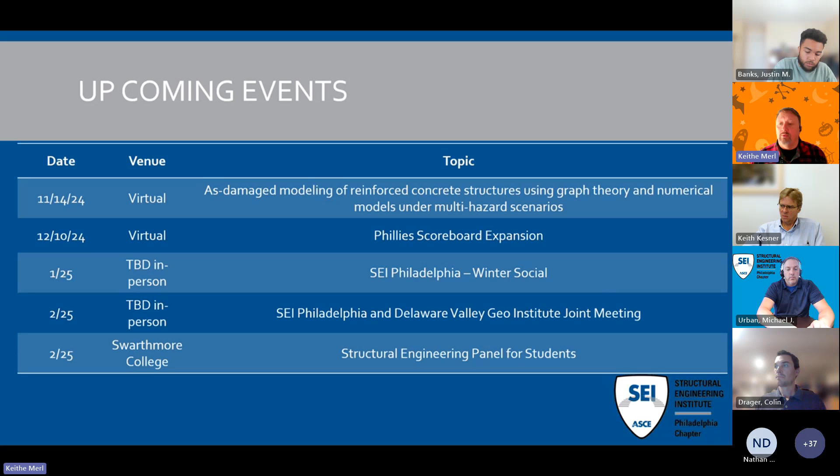So without further ado, I'd like to introduce today's speaker, Keith Kesner. 25 years of professional experience, so he's been doing this a long time. Certainly ask some questions and learn some stuff from him. Concrete, we all deal with concrete in our lives, and concrete doesn't last forever, I guess, unless you're a Roman, which they seem to have figured out, and we forgot all about it. BS from Connecticut, MS and PhD from Cornell University, so right up there with the smartest of the smart. I am so happy to be in your presence today, sir, and I look forward to you getting rolling here on the slideshow.

Thanks, Nathan. I'm going to start sharing my screen, and let's see if I can get this to work properly. There we go, I think that's correct. Looks correct to me. All right.

So I'd like to thank everybody for coming today. Thank you to Nathan and Keith for the invitation, and thank you to the board. It's really nice, as Keith mentioned in the intro, I'm an active member with ACI. I've done a lot of stuff with various ACI committees, and it's nice to have the opportunity to talk to an ASCE SEI chapter. I don't think it's something that we do enough. We tend to get siloed with professional organizations, and granted, nobody has enough time, but it's nice to talk to different people about different things.

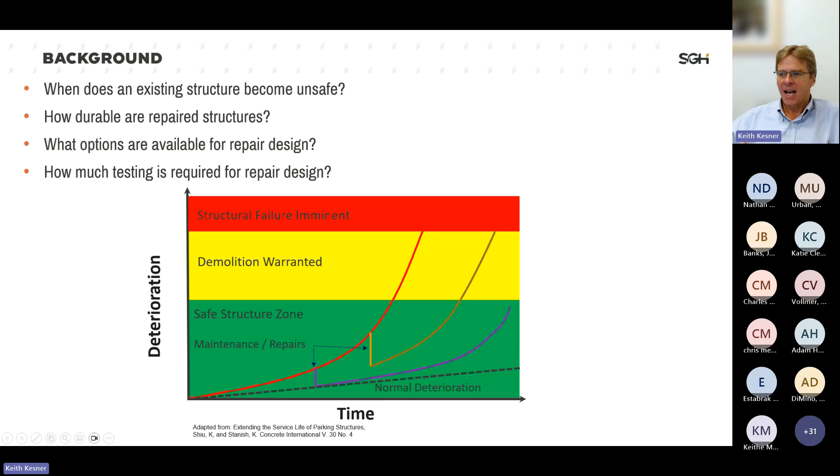We're going to talk a little bit about some options for repair design, different materials, and some of the background testing as to how we assess it. As I said, this is a hugely broad topic, so I'm really just scratching the surface on a lot of these topics. But I always loved, just thinking about existing structures, I always loved this quote, and I had to do a little bit of research to find out where it originally came from.

You can see the reference down there. It's by a gentleman named Dr. A.R. Dykes, and we're talking about, it's obviously a British spelling, but we're talking about molding materials we don't understand into shapes we can't analyze, to withstand forces we don't really know about, in such a way that the public has no idea of how stupid we are. That's basically what he said.

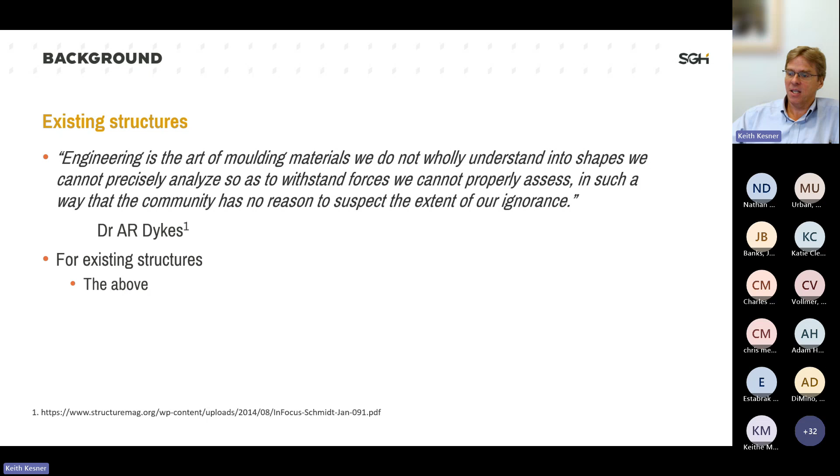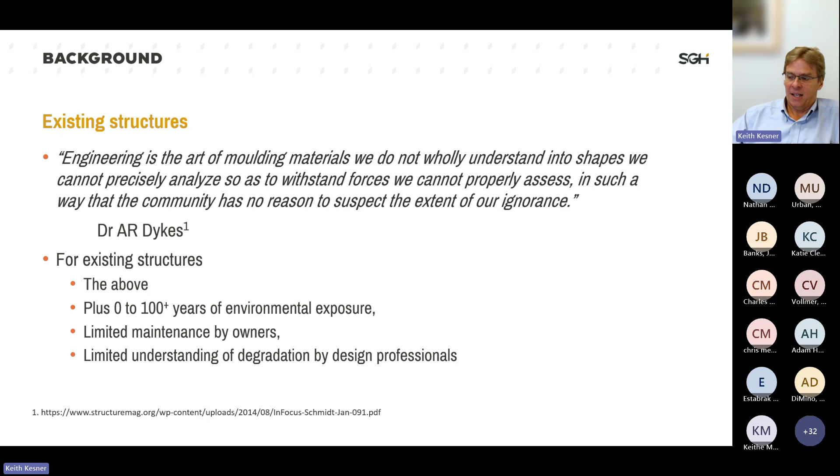When we start to think about existing structures versus new structures, you throw them out and leave them in the environment for 100, maybe 100 plus years. You don't maintain them, and we don't really understand degradation. Most design professionals really don't understand degradation of existing structures.

So what are the problems? What do we end up with? This problem of repair performance has been studied both by the Corps of Engineers in the United States and in the UK by the Building Research Establishment. They produced the graph shown in the upper right. This is the Building Research Establishment's graph. The Corps of Engineers data is very similar. It basically says once we start repairing a concrete structure, repairs do not last. Most repairs are failing in 6 to 10 years. That's kind of disappointing because we all know the problems once we have to repair a structure, and in the pictures you can see some failed repairs.

Why is this happening? We don't really practice durability design. It's not a common design condition that we're actually thinking about. In the last 10 years, Federal Highway said bridges are going to last 100 years. They did that, and in my opinion only, despite that mandate, we really don't have great consensus on how to do that and achieve a specific service life. Also in my opinion, US practice is a little bit behind international practice. There's much better practice in Europe and Australia for durability design. In the US, the origin is really that we don't understand existing structures, because we're not learning about durability as undergraduates or grad students.

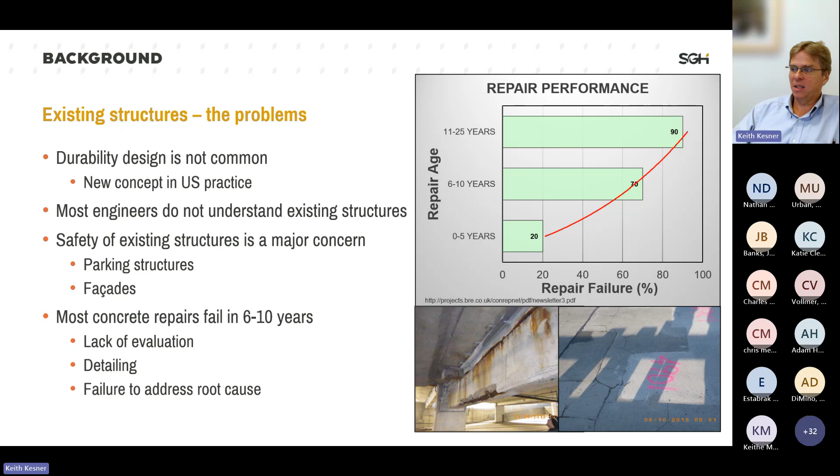So why is this happening? Really, we're not understanding the root cause of the problems. We don't do sufficient evaluations, and we're not detailing our repairs. So what does this look like? A couple pictures from failed repairs.

These are from my friend Tarek Alkhrdaji, who works at Structural as a repair contractor. These are all different structures that have had multiple cycles of repair, as you can see in the sort of cool looking mosaic on the left, or more ugly looking things where there's massive cracking from improper repair design, or combinations of corrosion damage plus repair failures. You can see over here, these are actually FRP strips that failed prior to this big section falling down.

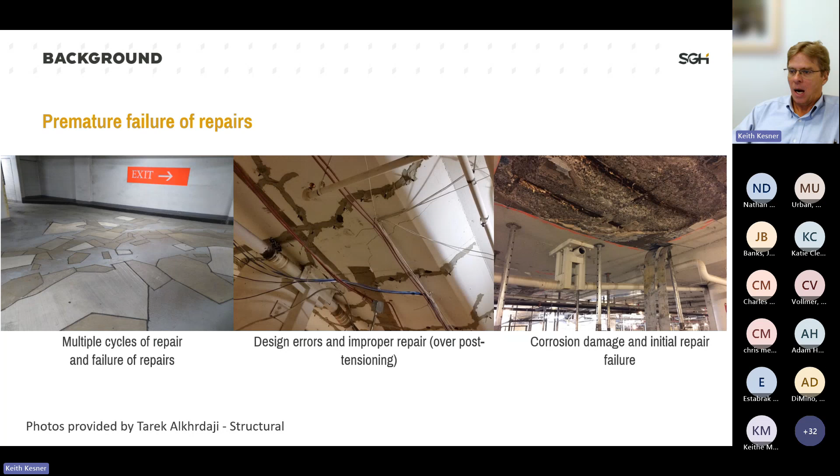That's kind of some of the things, and these are just in parking structures. We can also have similar things in bridges or other types of structures. So why are we getting these premature repair failures?

Really, it starts with concrete design, the problems with concrete design. In essence, building codes, whether for a building or a bridge, allow us to build the least durable structure that we're legally allowed to build, because a code provides a minimum requirement. Anything less than a minimum has been deemed to be unsafe. We can always do better, we can always exceed the code requirements, but the codes are always telling us it's going to have the least durable or least strong structure we can build. And entirely, in my opinion, our education in civil engineering and structures is entirely focused on structural behavior.

We really don't have a lot of coursework on durability. We look at the building code, but this is predominantly talking about ACI 318, and it lacks an integrated approach to durability. Durability in concrete structures is really a question of keeping water and other deleterious materials out and making sure that the materials you have are going to be durable. That includes both the concrete and the reinforcing steel.

If you read through the ACI 318 code and commentary, you'll never see that discussed. They talk about minimum requirements for concrete for initial structures based upon exposure. They'll talk about different types of reinforcing steel - you can use epoxy coated, galvanized, or regular steel. But there's really never a discussion about how you can put those together to create a more durable structure.

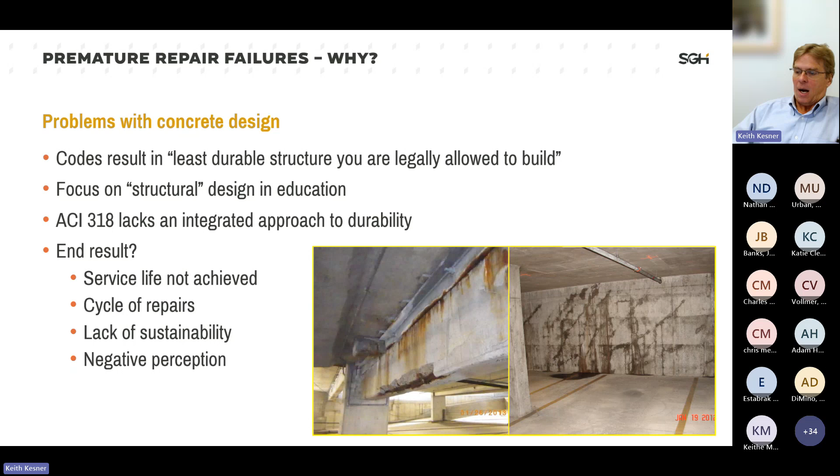So how can we focus on that? How can we do better? We need design professionals to start thinking about repair as a distinct area, understanding better how we can evaluate durability and evaluate structures. We need to get contractors focused on quality, and we really need to start changing US national codes to produce a more holistic approach to structural design. So we're actually starting to think in our code and building design about whether these structures will be durable, sustainable, and resilient. We're starting to see that in US practice, but we're really a long ways away from that.

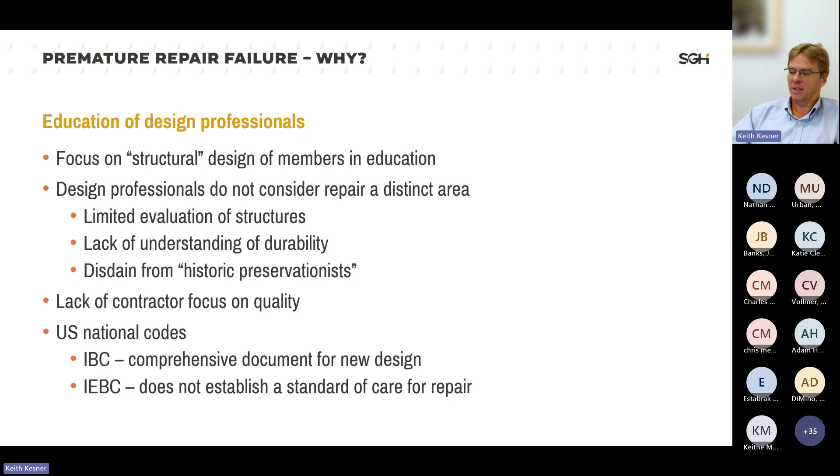The other problem we have, and I know this is predominantly a bridge audience, is that the IEBC, the International Existing Building Code, which is our building code for existing structures, really doesn't establish an effective standard of care for the evaluation or design of actual repair structures. It doesn't really define the level of durability that's required or provide a really good definition of damaged structures. And that impacts how we design repairs.

So today I'm going to talk about some new codes which came out from ACI and reports. ACI 562 was actually the concrete repair code that ACI developed - I was the chair of the second version of that code. It's really the first document developed exclusively to provide a code for repair of existing structures.

The other two are newer. ACI ITG 11-24, kind of a weird name, but that's a report. What I really wanted to talk about, and it is very new - it's the first document published - really talks about using statistical techniques for assessment of existing structures. Why is that important? It's important because when we start thinking about existing structures, we can't sample everything. We can't turn a structure into Swiss cheese. But we need to understand when we do take samples, what those samples mean, and how we can use those to better evaluate the safety of an existing structure.

What I thought was cool about this was, for those of us that took a graduate level course in reliability, it's kind of the first document that takes all that reliability theory we learned - some of which you also learned in advanced statistics as an undergraduate - and puts it into one document exclusively for concrete structures. So I think I'm going to talk a little bit about that today.

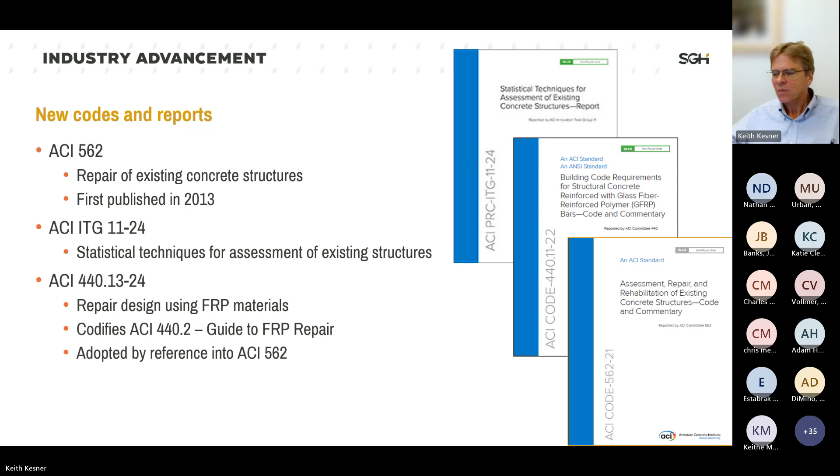So we're really trying to advance the industry that way, with the repair code establishing minimum performance of repaired structures.

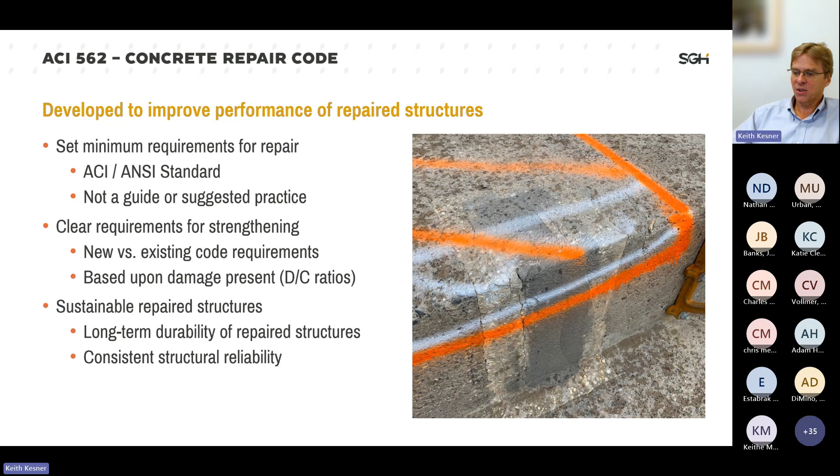How does it do this? It's a standard, not a guide. It wanted to provide clear requirements for strengthening of existing structures when required, based upon the damage that's present, and getting into this concept of more sustainable, more durable repaired structures.

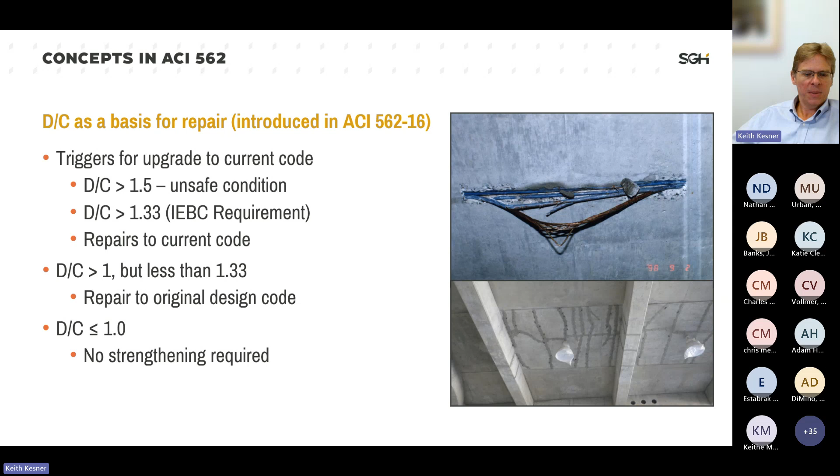So we're trying to get consistent performance and better levels of actual reliability. All these levels of performance were based upon demand to capacity ratios, based upon reliability work we did to establish when structures actually become unsafe and when we need to strengthen structures to current code requirements. You can see some of these trigger values in the attached chart on the screen.

But I wanted to go through how we actually use it on a typical project. Whenever I get a phone call or email about a new project, my initial thoughts are: what are we going to do? Do we need to do just a detailed evaluation? Do I know anything about the structure, or can I just go out there? And then what sort of unsafe conditions may be present?

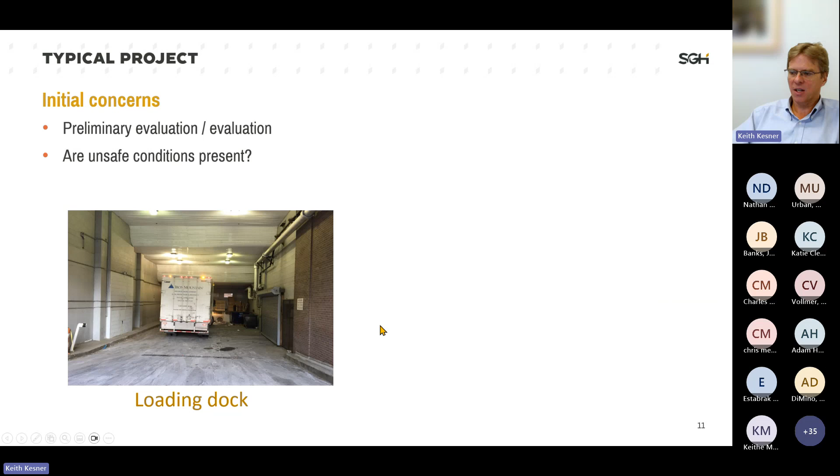This is a project I worked on a couple of years back. This is a loading dock and entrance to the parking garage, which you can see at the roll down door here. It's not super heavily loaded—we're not getting semis into this thing, but fairly reasonable sized trucks are going into this loading dock, certainly greater than a passenger car but not quite a semi. So what was the problem?

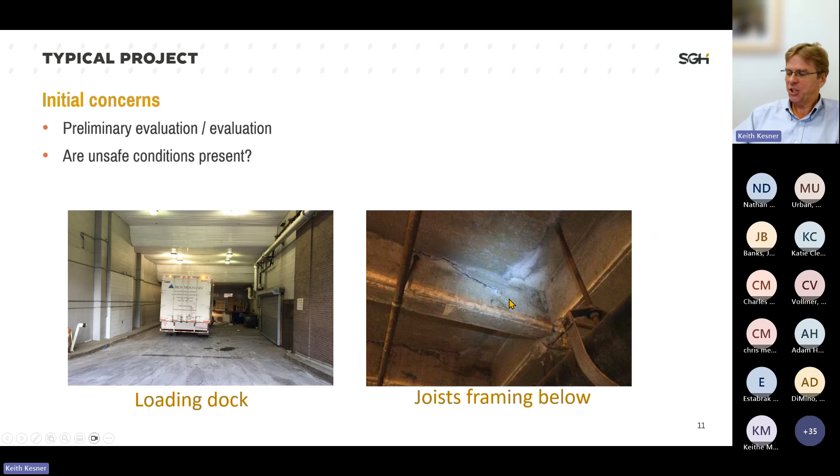Underneath, directly underneath this location, one-way concrete joists were basically failed in shear. Once I saw this, we started thinking: what's going on? What sort of unsafe conditions are present? But also, when we started thinking about the repair code, how are unsafe conditions defined?

A definition is presented in the IEBC. It talks about partially collapsed structures, so loose materials—yes. Example on the right, which is from Franklin Field before the repairs: that loose material held up on the netting, that's unsafe.

The IEBC talks specifically about a risk of collapse under service load, but what level of risk? That's not defined—that was always left for the engineer to figure out. The IPMC, International Property Maintenance Code, tries to specify: is the strength exceeded by the nominal load? Is that a better question? That's actually a little bit better definition. But the important thing is the IEBC and IPMC don't give you any information about how to actually calculate the capacity. And that's a lot of what we did with ACI 562.

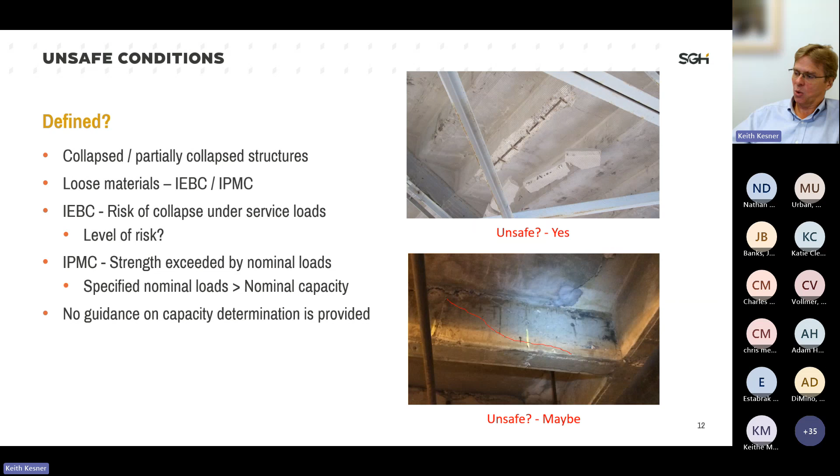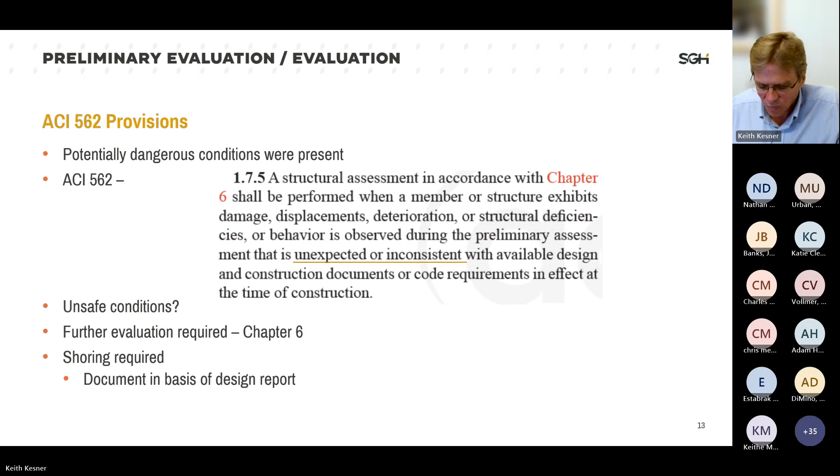So when I look at this picture of this joist, is that truly unsafe? Maybe. Going back through on this project, we found that potentially dangerous conditions were present, and that's used as a trigger to require additional evaluation. It was also used as a trigger to document the need for shoring.

So what are we looking at? Why is it unsafe? The shear capacity of a joist—demand to capacity ratio, if it's greater than 1.5, it's considered unsafe. So pretty simple. Shear capacity is VC plus VS, so it's 0.75 times VC plus VS. VC, because of the crack, is 0.

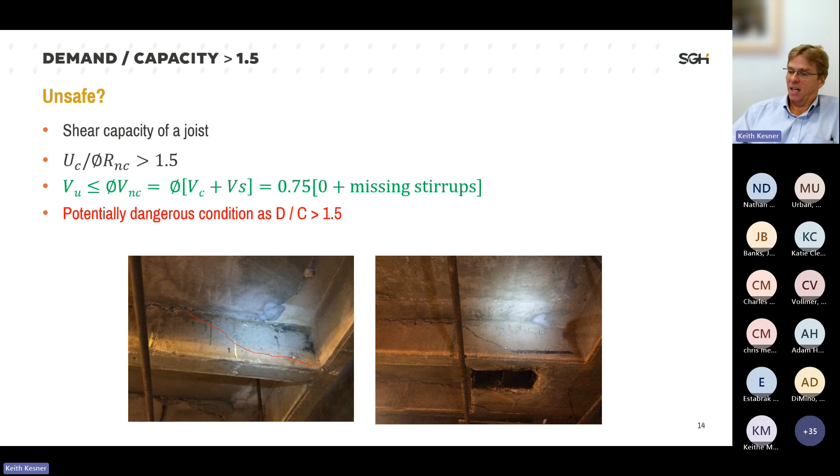When we did some radar, we basically found it's missing most of the stirrups that we're supposed to have. So 0 plus 0 from missing stirrups is significantly unsafe. So that was potentially dangerous, and we did need to shore it.

How do we shore it? The owner told us very explicitly that when we shored it, we needed to keep the structure open. So we provided layout plans for the shoring. The contractor did design the actual shoring based upon the shoring load requirements and shoring placement requirements that we gave them. And we allowed that structure to remain in service once it was shored.

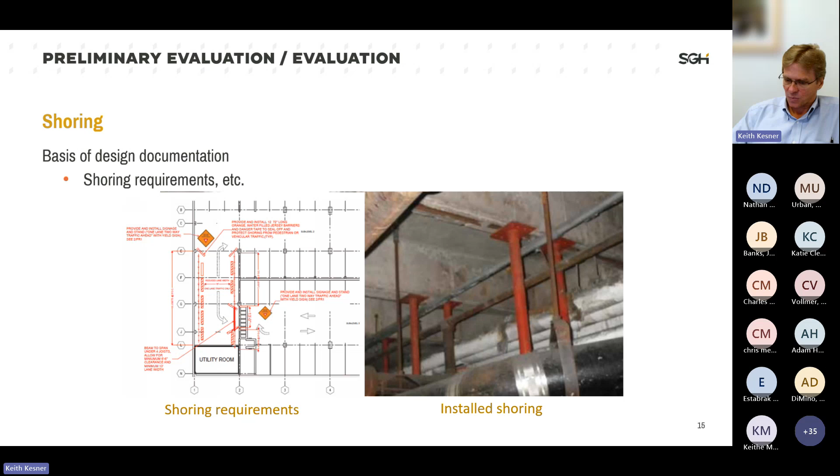So thinking about how we used ACI 562 on this and what were some of the advantages: the evaluation of the damage was simpler because of clear definition. As the damage was defined, we had fairly clear evaluation requirements. The unsafe conditions, instead of being vague definitions, were based upon damage and actual presence of conditions. And then when we eventually got into the repair design, the actual repair design had well delineated requirements.

We're talking about durability. For background, we ended up replacing the entire loading dock area during a winter break. It was done in 3.5 weeks, starting the day after Christmas, finished before classes started. Eventually a coating was placed on it.

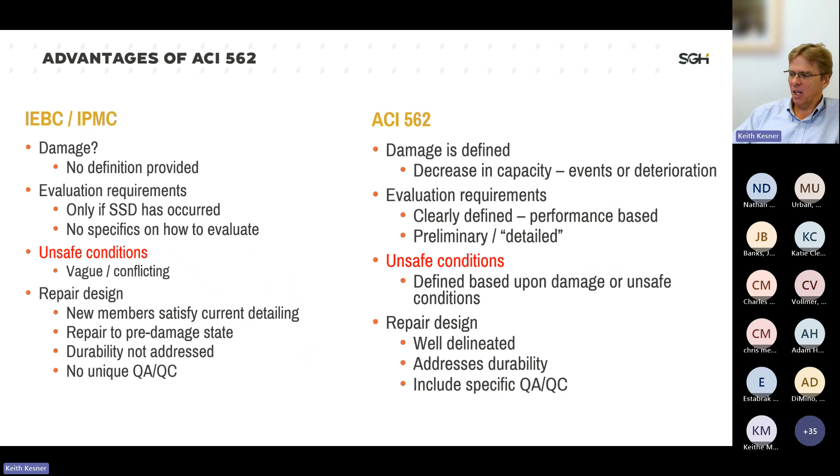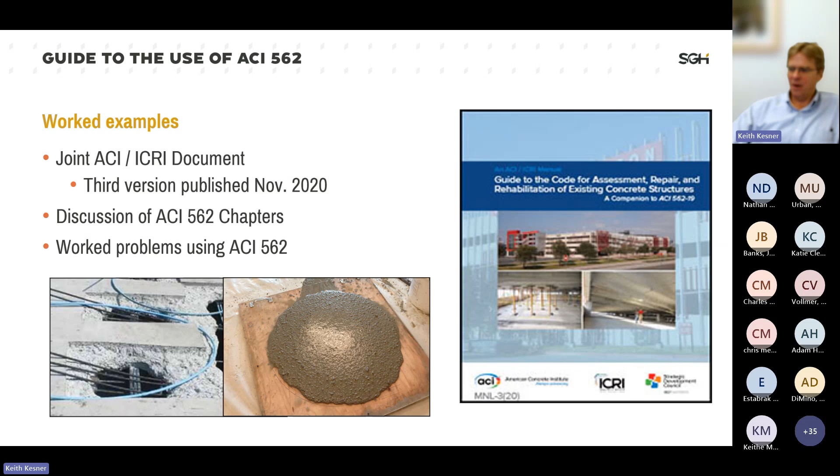I'm going to come back to another example using ACI 562 later in the presentation, but if people are interested in the document, one of the other useful documents is a guide to the code, equivalent to the old PCA notes for ACI 318. This was jointly published with the International Concrete Repair Institute, and it provides a lot of worked examples using ACI 562 and a discussion of how the code's intended to work. So that's another useful document.

Statistical techniques for assessment of existing concrete structures - that's a long title. When we developed the 2019 version of ACI 562, we recognized that design professionals needed more guidance. We didn't have sufficient technical guidance on some of the statistical techniques we're using to evaluate these structures.

Starting back, when we talk about assessment of existing concrete structures, we're typically taking cores. We may be doing measurements of cover depth, measurements of chloride content. We may get samples of material, samples of concrete from a slab versus a beam. Are there differences, and are any differences in the results statistically significant? If we have cover measurements, what's our confidence level that we have in them?

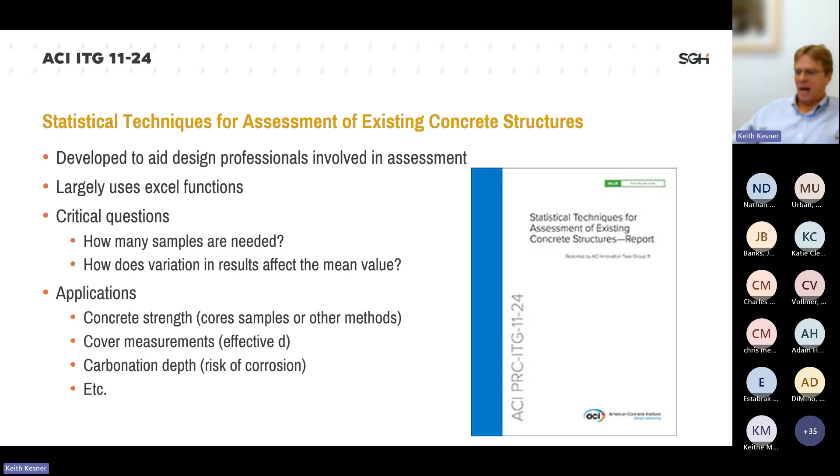So this document was put together as a way to explain a lot of those statistical functions, largely based upon Excel. It's all built into Excel, and it helps us understand when we're doing this work, how many samples may be needed depending upon the confidence level that we want. How does the variation affect the mean value? What are our applications - cover measurements, concrete strength? There's a lot of them.

There's an actual procedure outlined in the ITG where we're evaluating using what's statistically termed the F test, which is a comparison of variance. If your F test result is greater than 0.05, it's not significant. For this data set, despite the differences in the standard deviation, the F test result indicated the differences were not statistically significant. What that allows you to do is provide a much bigger sample - instead of having 12 cores in 2 different sets of samples, you can really consider that one statistical sample.

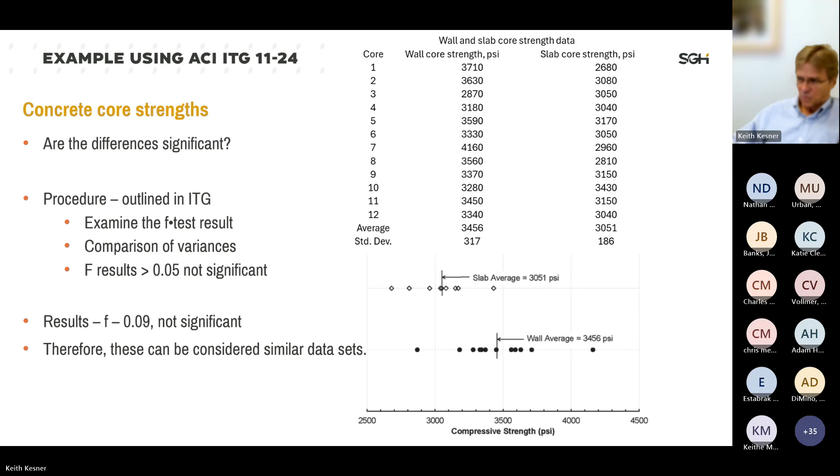And there are similar data sets. That helps you out in your analysis - now you have a much bigger sample.

Some of the other topics covered: if you have a desired confidence level, how big a sample size do you need?

Reliability-based assessment of member strength. So if we have a member that has a variation in concrete material properties, reinforcing steel depth - how does that variation affect the actual strength of the member, and what does that mean?

The other thing that ties in is something called the mean load method, which allows us to do a calculation of reliability. We're all familiar with the concept of beta as a measure of the probability of failure of a structure. We can calculate beta based upon average strength values obtained from the structure without load or strength factors, based upon a first order reliability assessment. There's a nice worked example on how you do that, which is basically a simple way to calculate the probability of failure of a structure.

So that's some of the things that are present in the ITG. I just want to include that as part of this talk, to make people aware that the document's available.

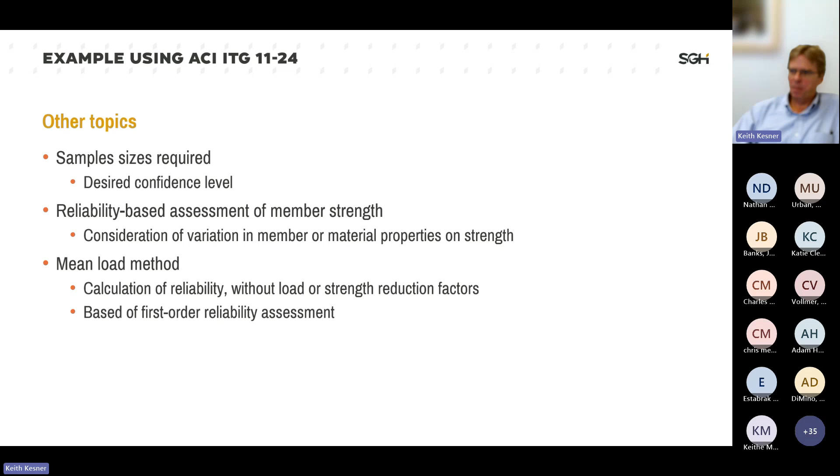So let's talk a little bit now, jumping ahead, about strengthening structures with FRP systems. There's tons of FRP type systems out there - basically high strength fibers. These are applied to concrete structures, masonry structures, bridges, parking structures.

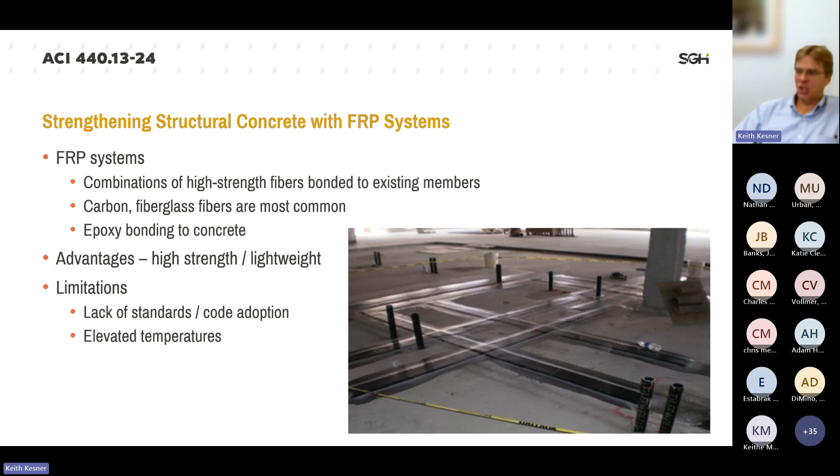We're typically using glass or carbon fibers, then using epoxy to bind them to a structure. These are all high strength, lightweight. But what's the limitation? There's really been two. They don't perform well at elevated temperatures, so if you're exposed to fire, that's a problem, and it's very difficult to fire protect these. The other issue has really been a lack of standards and code adoption, and that's what's changed in the last couple of years, and that's what we're going to talk about today.

So different applications - some of these slides are from my colleague Gustavo Tumialan at SGH. These can be used to strengthen a flexural member, where we're adding external reinforcement that's bonded. Very commonly used to increase the shear strength of a member. You can also, though it's not the best use of the material, provide some axial strengthening. But more importantly, when you wrap them around a structure, you're providing better confinement, which allows for better seismic performance. So those are some of the common applications.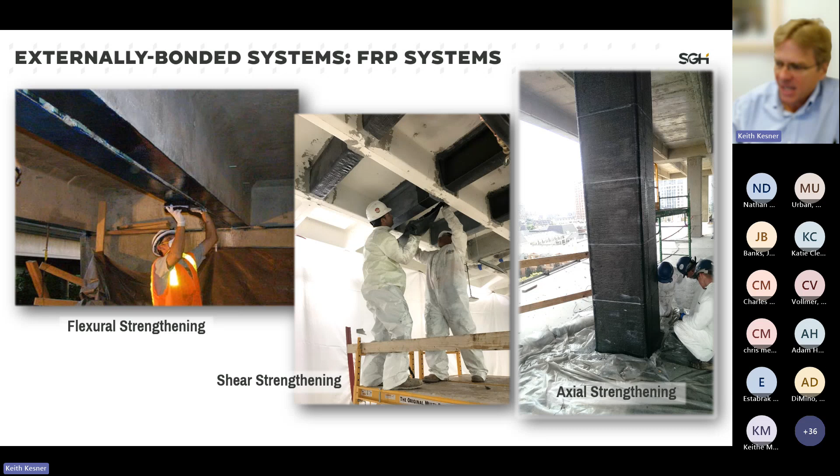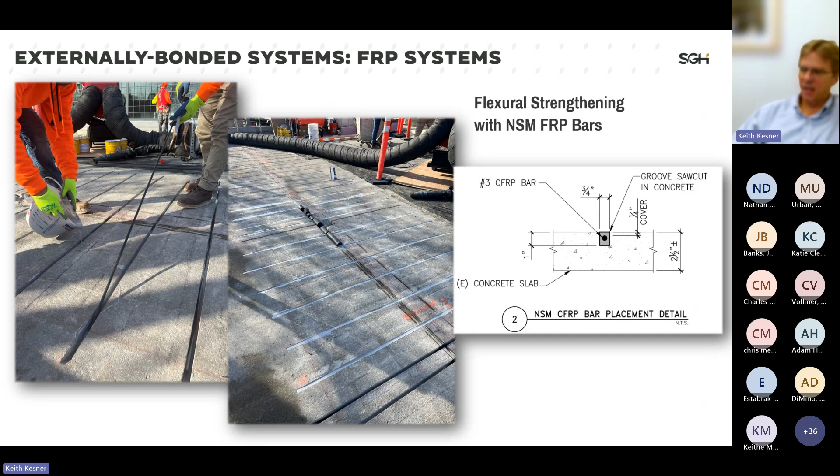These can be internal or external. The previous slide, they were all on the exterior, using epoxy to bond to the structure. When you're doing it internally, you're cutting a slot in the structure, and then using epoxy or other adhesive to bond the FRP bar back into the concrete structure.

So some design considerations. What's really being done? ACI 562 adopted the ACI 440S document by reference, and ACI 440S was really a codified version of the ACI 440.2 guide. In terms of hierarchy, a guide cannot be adopted into a code - only a code can be adopted into a code. When you adopt a code by reference, that brings all those mandatory requirements of the specialty code, in this case 440S, into the adopting code, which is 562.

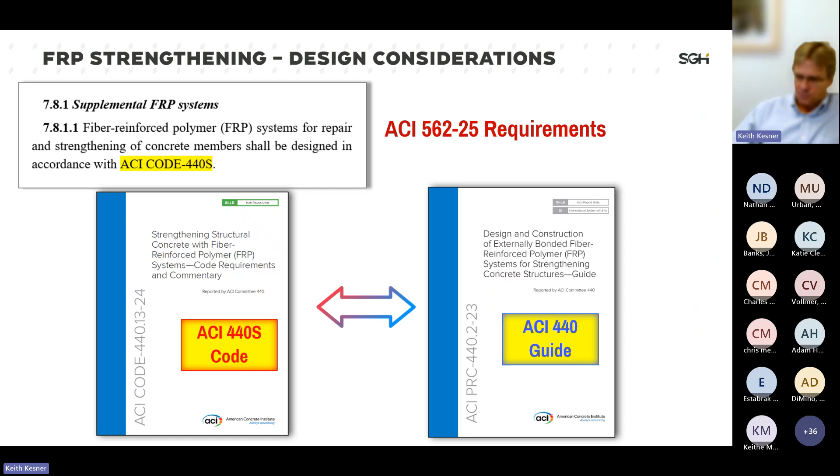So what this does is it allows us as an ACI 562 member to get all the strengths and all the critical knowledge that's in the ACI 440 brought in, and it's a lot simpler process, so we don't have to repeat it in the actual ACI 562 codes. This is the process that was put forth, and this new code now allows direct use of FRP in a design code.

One primary limitation when we're talking about FRP structures: when we're adding an FRP structure, we have to have some minimum capacity without the FRP being present, shown in those two load combinations. Why is this necessary? We think of an FRP as external reinforcement added onto a structure. That FRP can be damaged by impact, by idiots with grinders, by miscellaneous tradesmen that don't understand what it is. So there's a possibility, may not be high, that an FRP can be cut or made useless during service. So we have this minimum capacity.

What this minimum capacity also does is provide a backdoor limitation on how much FRP can be added to a structure. What does that mean? When we're reinforcing something, we're trying to take it up to like 1.6 live load, and our minimum is 0.5 live load. The maximum we're really adding in terms of strengthening is about 1.1 times the live load. So that's providing a limit as to how much FRP. Why is that important? Because when you put on too much FRP, it just doesn't work - you can't get the strain into it. So this is another way of limiting how much additional reinforcement can be added, and this further prevents brittle failures of reinforced concrete structures.

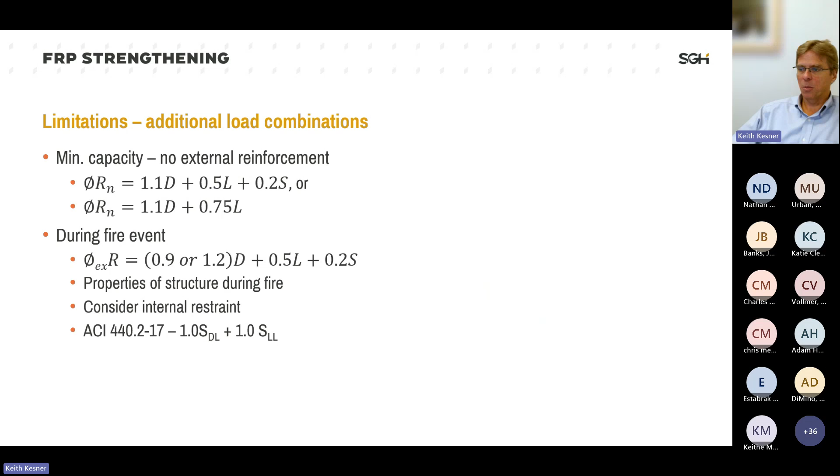Another consideration: during a fire event you need a minimum strength of the structure, similar to before, but here we're considering the properties of the concrete structure during the fire event, as well as the internal restraint provided by the structure. So there are some limitations in terms of load combinations when using FRP. Not going to go through a super detailed case study, but let's look - we have an existing two-way slab, 6-inch slab, with some drop panels present, 2-inch thick drop panels. There's an interest in having a superimposed dead load of 10 PSF and a live load of 40 PSF.

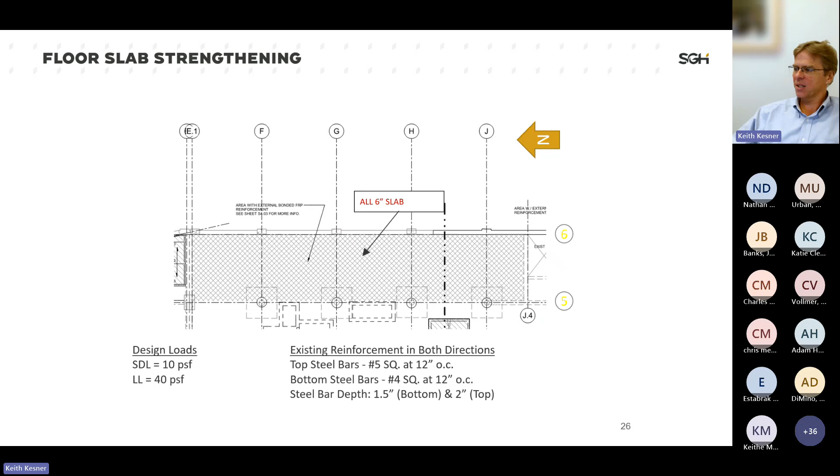And there's a question about the capacity of the slab. To evaluate the structure, cores were done for concrete compressive strength samples as well as slab thickness. Then GPR was used for locating existing reinforcing steel.

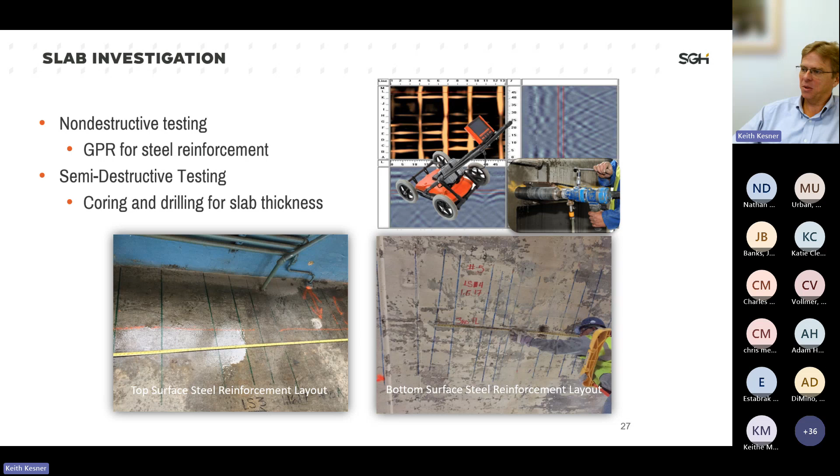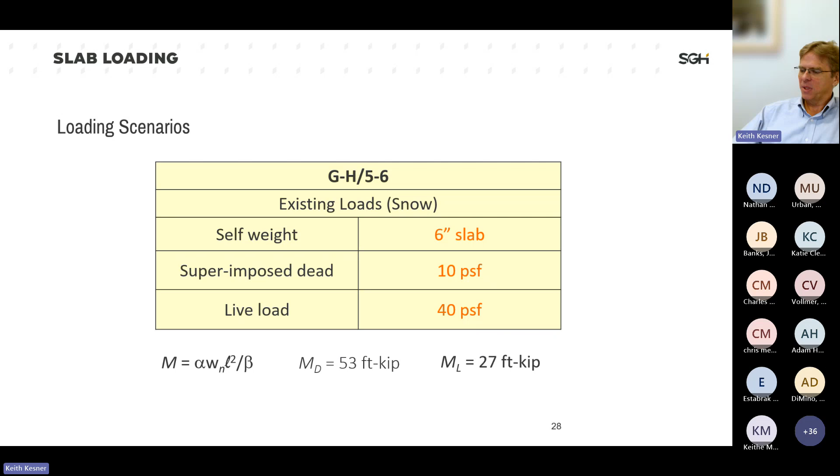In terms of this presentation, both of those topics could be full one-hour seminars on their own. So we had different loading scenarios for this structure: live load, superimposed dead load, and different combinations of dead and live load. When we looked at the results, we found that the demand, MU, was greater than the existing capacity based on where the reinforcing steel was. Not horribly deficient - depending on the location, maybe 10%, 20% deficient - but still deficient.

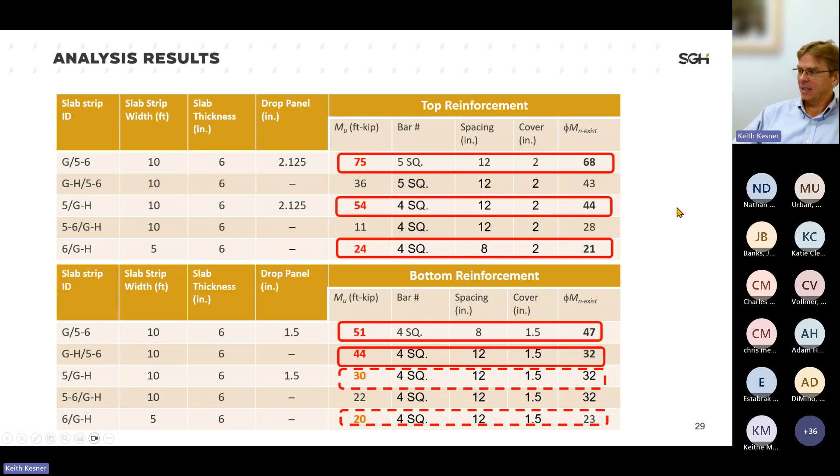So a decision was made that some sort of strengthening would be required. What options do you have? You could try to cut in and add more existing bonded reinforcing steel, or increase the surface depth, but that adds dead load. So FRP in this situation was really a nice choice because it's lightweight and adds almost no load to the structure.

There are fairly well-defined design procedures. What are we really doing? We're upgrading the section. In terms of concrete, it's the existing capacity from the reinforcing steel plus the area of the fiber, the width of the fiber - basically how much FRP we're adding, the effective stress we're allowing on the fiber, times the depth of the section. Conceptually it's exactly the same as conventional reinforced concrete design.

This example uses FRP sheets. With those sheets, we're thinking about both the rupture strain and the tensile strength of the fibers, then figuring out what the effective strain would be when actually applying them to the structure. So we're reducing the nominal design strength to create an effective strength, considering environmental exposure and the effective strain prior to failure.

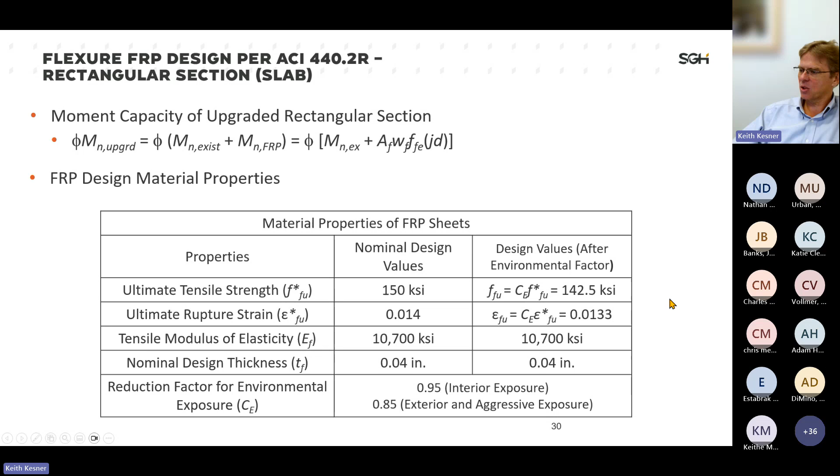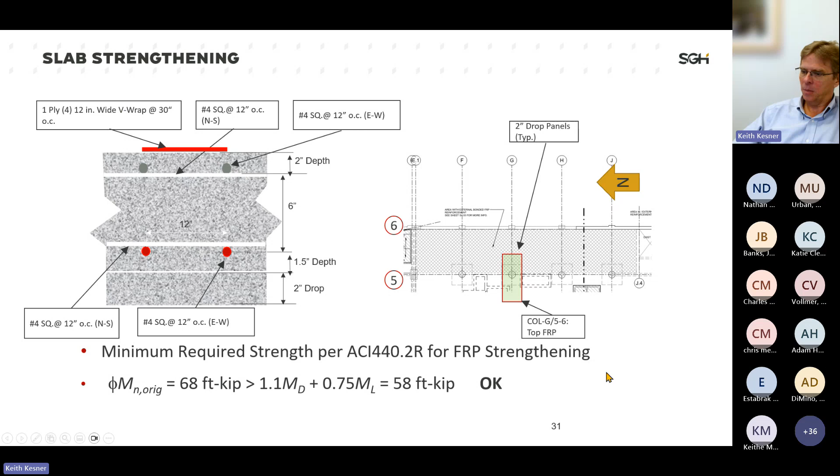So what does that look like? Taking a look at different sections: a single ply of fiber, 30-inch spacing, 12-inch wide strip, adding that onto the existing reinforcing steel on the top side, and we end up with a calculated minimum strength. We check our minimum strength - that was okay.

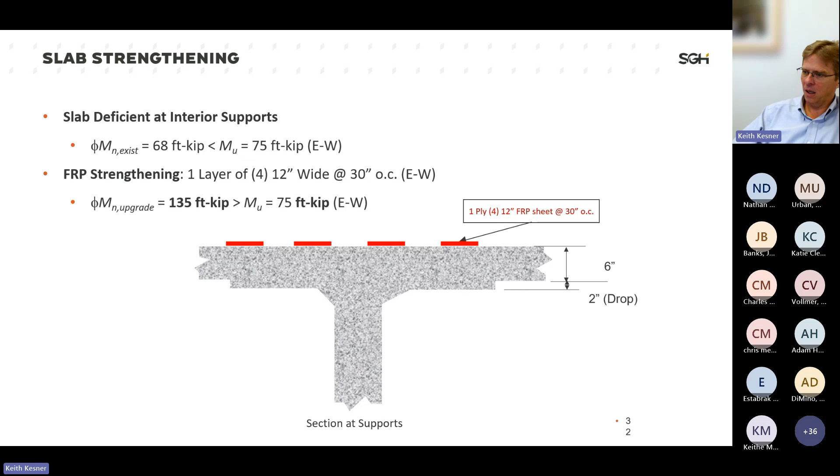At the interior supports, we're adding one strip of FRP, spaced 30 inches on center, and we're determining that the upgraded strength is substantially better than the originally designed strength. We could actually probably get rid of some of that FRP, make it a little thinner. Again, looking to confirm that the minimum strength was satisfied.

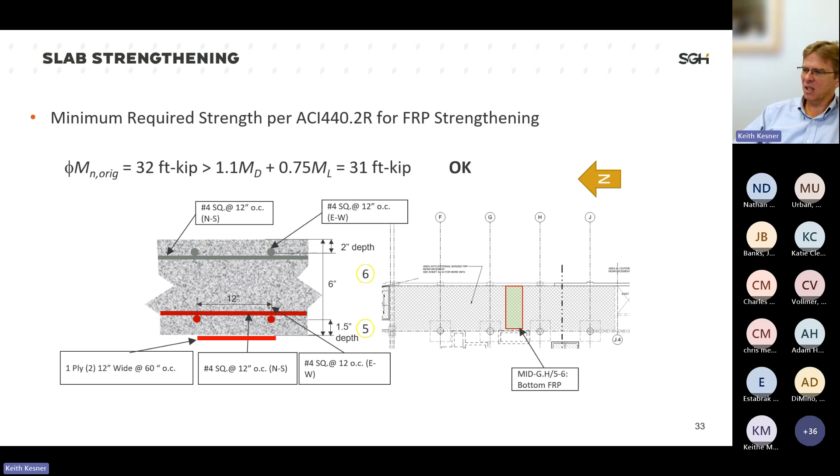Again, it's one strip of FRP on the bottom side, now 60 inches on center. Some simple calculations looking at the midspan. So what does it end up looking like? Depending on where you are - bottom surface, top surface - different amounts of FRP are bonded in to allow for strengthening of the two-way plate, where most of our strengthening is actually added in the negative moment regions near the columns.

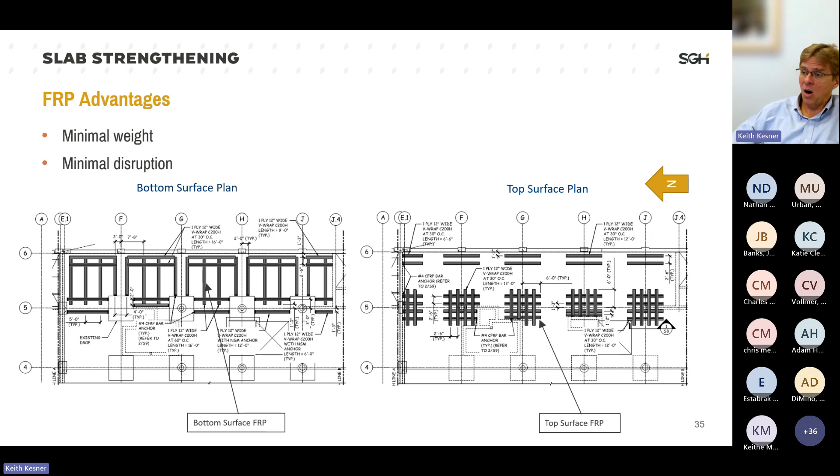What are the advantages of this? This is a minimal weight solution - there's almost no added weight. It's added in with minimal disruption. We're basically grinding and cleaning the concrete surface, allowing it to be installed with minimal disruption to the owner, and it's relatively quick.

So going back to ACI 562 and trying to improve that concept of durability, addressed in Chapter 8 of ACI 562 - when we talk about durability of a structure, it's a 'we' problem because there's a whole bunch of people involved. The code recognizes that an owner may only want to own a structure for 2 years, so they may not be interested in long-term durability. We also have the problem of the durability of repairs, the repaired structure, and how that repair and the repaired structure interact.

We recognize the need for maintenance, and then we have some ghosts. The ghost of Christmas past - what do we start with? What do we want to achieve - that's the ghost of Christmas present. And the ghost of Christmas future - what's going to happen in the future? Is the design professional going to design for durability? Will the owner maintain it?

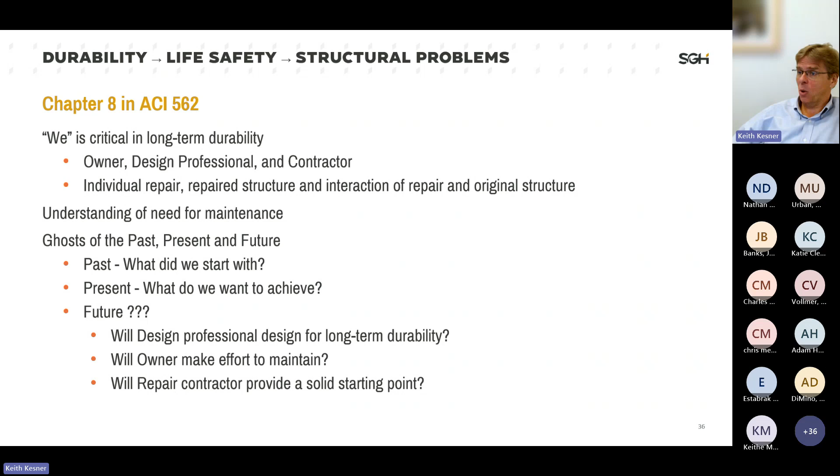Will a contractor provide us a decent starting point? These are some of the questions we have when we start talking about durability. Let's talk about durability with a quick case study from my past.

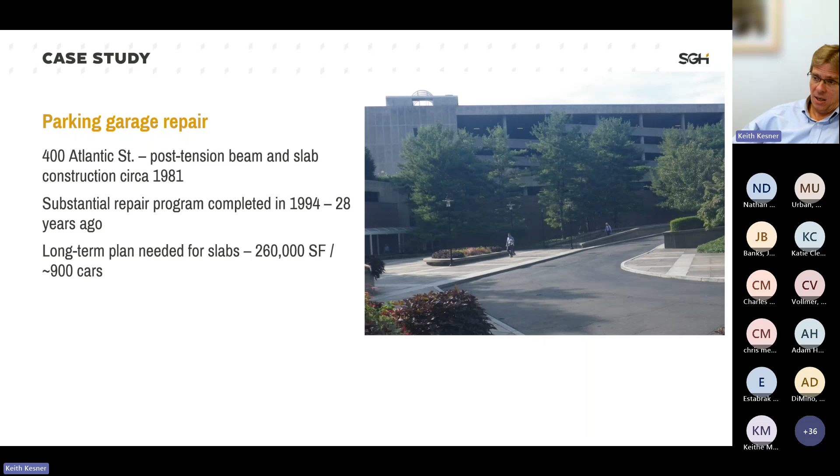This is a parking garage repair in Stamford, Connecticut, with post-tension beams and slabs. In 1994, about 30 years ago now, a substantial repair program was completed. I was involved with the repair design of this 260,000 square foot, 900 car garage.

A fairly extensive repair was done, with a lot of strengthening added. You can see the large beam that we added.

At the end of the repair project, the owner said, 'You're a nice guy, Keith. You're a nice guy, Randy, but I don't want you guys back in here forever. We need a long-term protection plan for the slabs. We need a coating, and I don't want to see you guys for at least 15 years.' As design professionals, we recognized this was a parking structure exposed to chlorides, needed traction, and needed long-term performance.

So we looked at a whole bunch of different options. You can see me 25 years ago out with our owner looking at the performance of bridge deck overlays, multi-layer epoxy overlays.

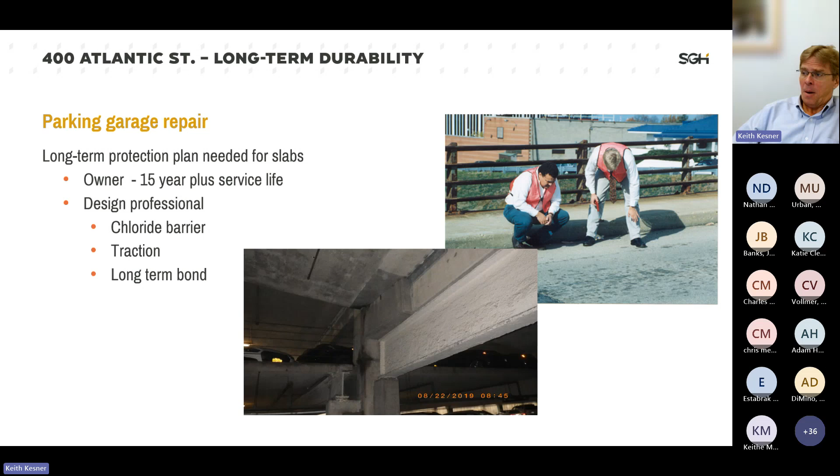But why do I bring this up? A lot of what we were thinking about was brought into the ACI 562 code, with code specifics thinking about causes of current conditions, making sure our repair materials are compatible with the structure and service environment, considering moisture transmission through the slab. We're talking about adding an epoxy, which is a moisture barrier, so that needs to be considered, along with interaction and impact of abrasion and cracking, and establishing construction inspection requirements so we're actually getting what we want.

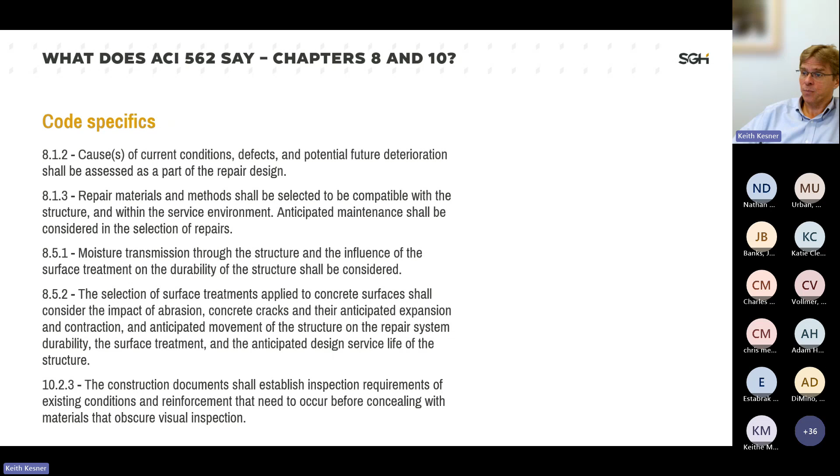As I said, we eventually decided upon applying a multi-layer epoxy overlay, which is bridge deck technology. We did a trial installation and a lot of pull bond testing during construction, along with chloride permeability testing to make sure it was working. These are some of the initial results on the right.

You can see some of our initial test results, and it was consistent. The graph, some of you may recognize, is from the SHRP program, the original one, not SHRP 2, where they looked at different performance options for bridge decks. This was actually a lucky project for me.

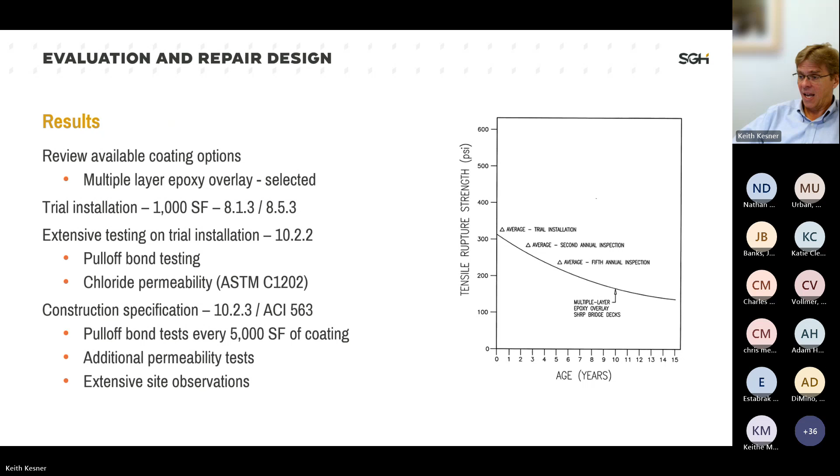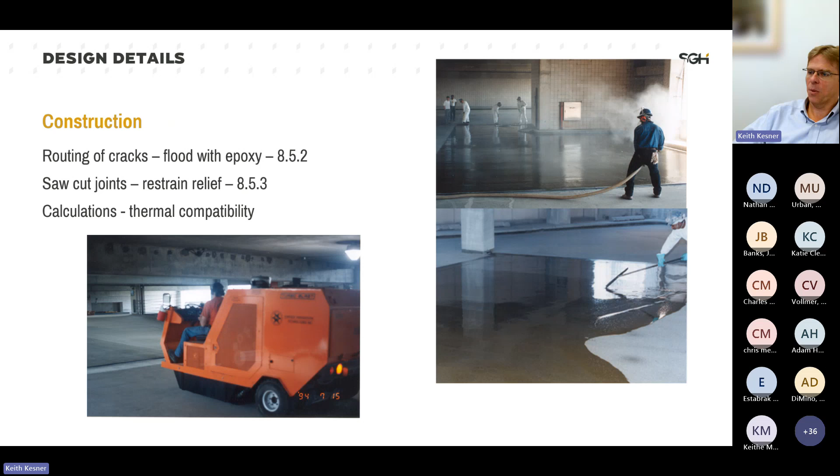This is some of our construction pictures. We flooded the cracks with the epoxy, took some restraint, added in some saw cuts, and did a lot of calculations to make sure our thermal compatibility was working. The project, as I mentioned, was actually completed in 1994, probably before some of the people in the audience were born. It's kind of scary.

But I've been lucky on that project in that I've been able to go back to that structure and look at how it's actually performing. In 2019, and actually a bit later than that, we're talking about 25 plus years after installation, we're still seeing good bond performance of the structure. As you can see in the graph on the right, we're still getting good tensile rupture strength, very little overlay delamination, and limited chloride ingress.

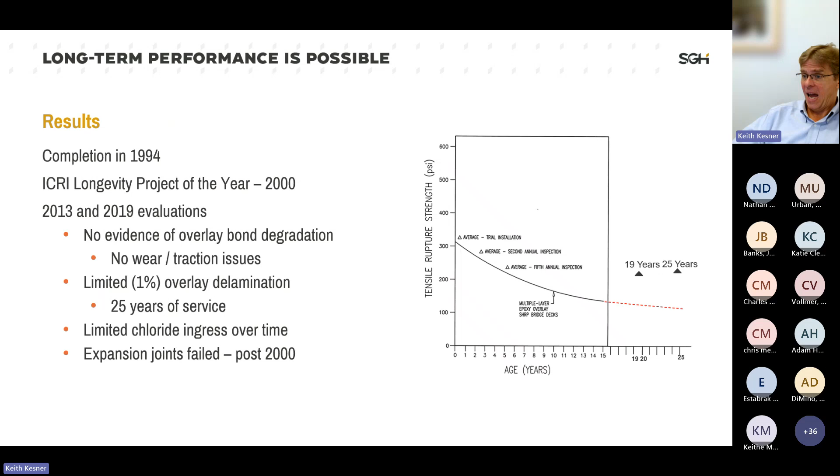One of the problems we had is our expansion joints failed basically as soon as the warranty ended. But what this is really telling us is that if we think about durability in repairs, we can actually get there. So we started this presentation talking about all the problems with repaired concrete structures and a lack of durability of concrete structures.

But I think what we're actually doing now with some of the new ACI documents, we can improve the performance of concrete structures, and we can do this in a very specific way.

We need to create standards, establishing minimum requirements for repair. We need to actually get design professionals thinking about how we're going to assess these structures so we're not missing existing conditions, getting people thinking about structural reliability and long-term durability as part of our repair design. And at the same time, we need to think about the owner's goals and requirements when we talk about long-term durability, because it did cost more to do that project that way.

And it does. And now if I want to mitigate future damage, it will cost more, and that's a cost the owner is going to have to bear. We have to recognize that may not be a repair the owner wants to make, so encouraging our owners to think about how we assess these structures and understand their goals is important.

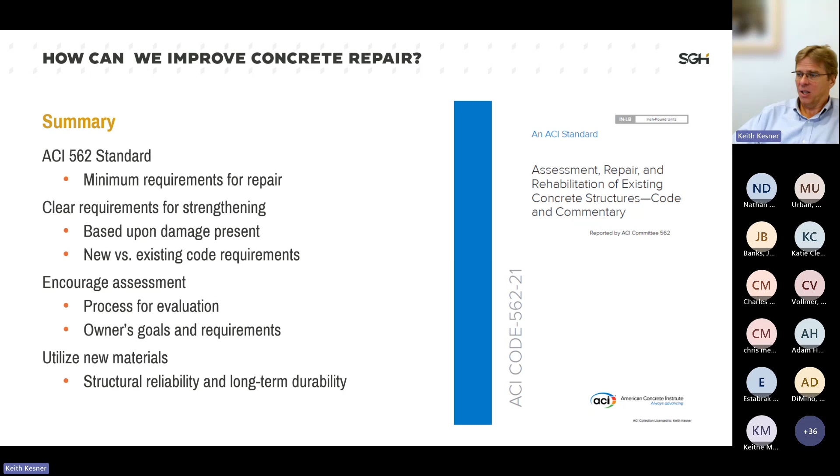And I guess with that, I'm going to open it up to any questions. But before I do, there are a couple of people I'd like to acknowledge, the committee members who put in a lot of effort on these documents: Kevin Conroy, my colleague Tarek Alkhrdaji with Structural, and Khaled Nahlawi with ACI, who provided a lot of the background slides. So I'll open it up to see if anybody has questions.

So I don't see any in the Q&A, but I did have a question. Is there a way to coat or protect the externally bonded FRP to reduce the impacts of extreme heat?

There's not a good one. You do see some people putting cementitious coatings on top of the FRP, but the problem is if you have something externally bonded and exposed to fire, it just doesn't hold up. There are some epoxies with better thermal performance, but it's not common. Once you get to a temperature of about 180 degrees Fahrenheit, depending on the epoxy, you start to see softening of the material as it reaches the glass transition temperature of the epoxy, which is when it starts to actually degrade.